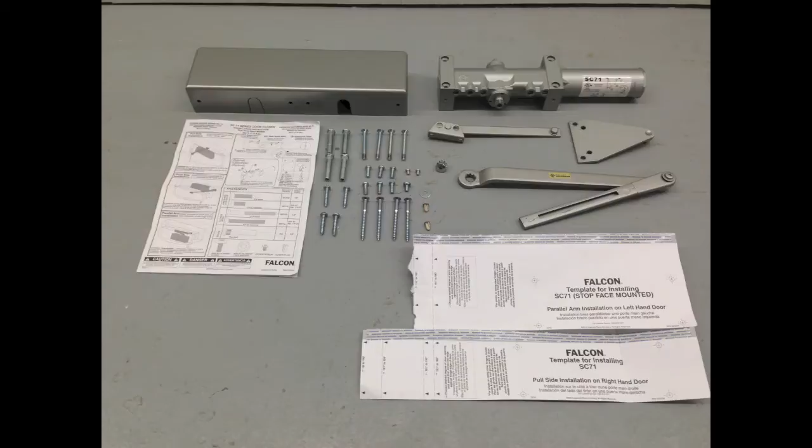These are the tools you will need. In the box, you will find the closer, regular arm, parallel arm bracket, rod and shoe, cover, screw pack, instruction sheet, and stick-on template. Unless specified otherwise, the Falcon SC71 is a universal closer that comes with all parts necessary to be installed with a regular arm, parallel arm, or top jamb mount.

The screw pack contains fasteners for wood and metal openings. You will have screws left over at the end of this installation. If this is a new construction project, check the hardware schedule to confirm you have the correct closer for the opening.

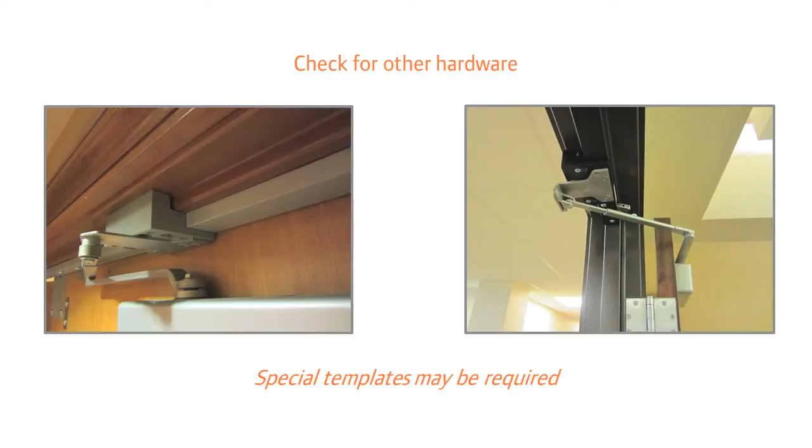Check the opening for other hardware mounted on the top jamb. Items such as a coordinator or overhead holder can affect the installation of the closer, and special templates may be required. Ensure the door swings freely, fits into the frame without binding, and that any latching hardware engages easily. There should be a 1/8 inch gap on the top and sides between the door and frame.

Determine the handing of your door. To determine the hand of your door, first put your back to the jamb where the hinges are. If the door swings to your left, it's a left-hand door. If the door swings to your right, it's a right-hand door. Next, determine how far the door opens and find the matching line on the template. In this opening, the door will open to 150 degrees.

With the door closed, affix the self-adhesive template to the inside of the door, aligning the edge of the template with the hinge and top edges of the door, as shown on the label. For doors with pivots or swing clear hinges, locate the closer and shoe from the pivot point of the door. Using the center punch, mark the locations to be drilled on the door and frame. Remove the template from the door.

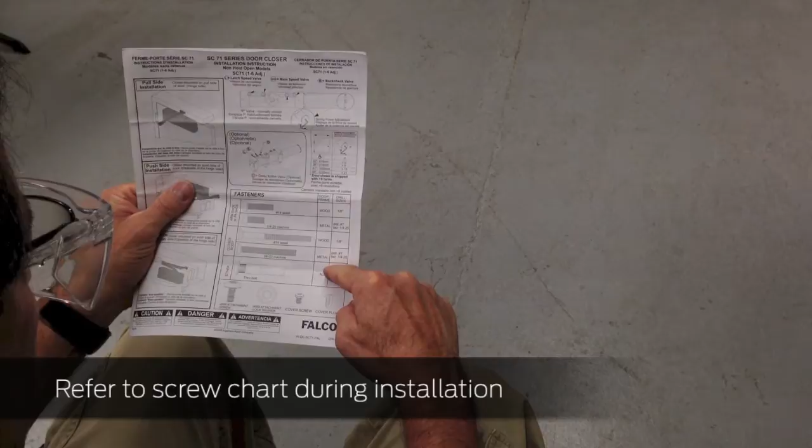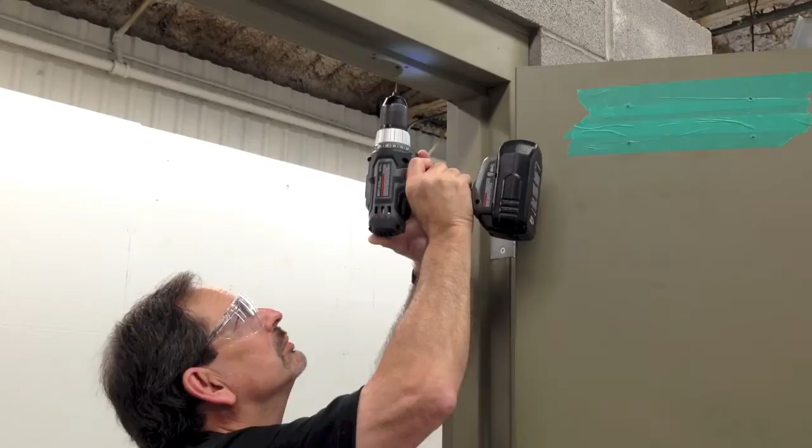Follow the screw chart on the front page of the installation instructions to determine the proper fasteners for each step. This chart also shows the size of the pilot hole needed for each type of screw. Using a number 7 drill bit, drill pilot holes in all marked locations on the door and frame. Using a 1/4-20 tap, tap each hole on the door and frame.

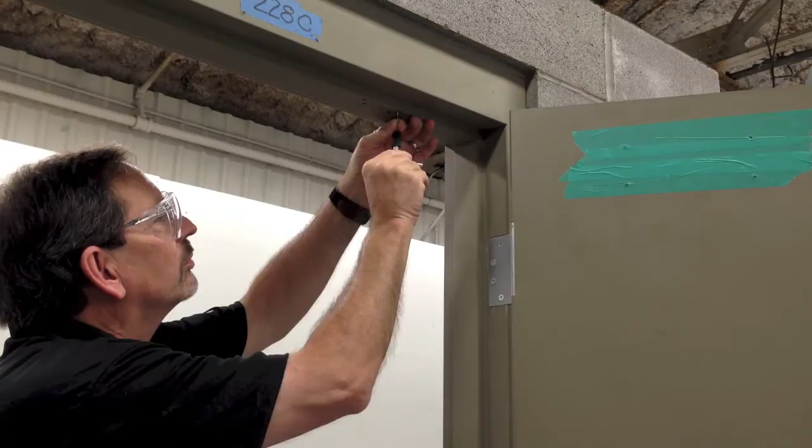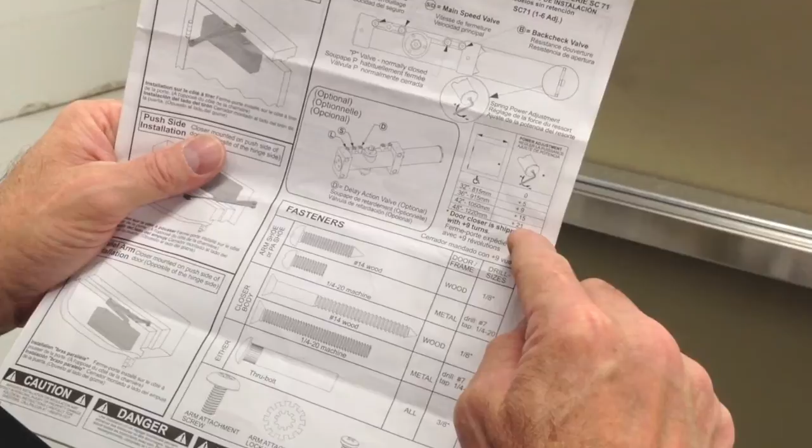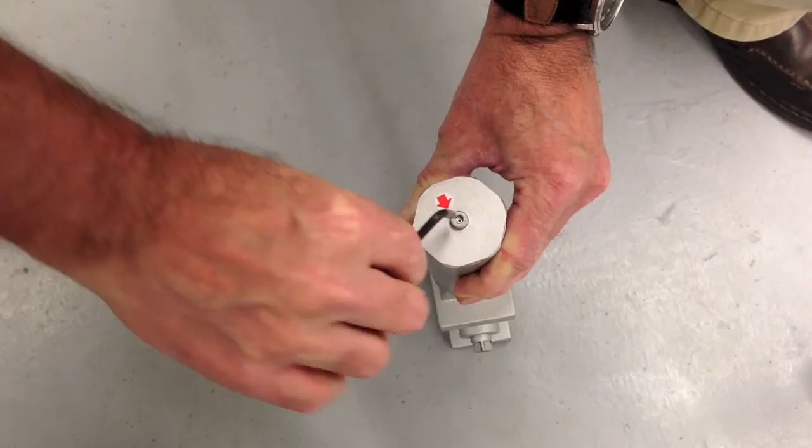The Falcon SC71 spring power can be adjusted to provide proper closing force for your door. Please note, an improperly adjusted spring may result in personal or property damage. Using the chart and the instructions, determine the spring power setting based on the door width and location of the opening. Falcon measures spring power by number of turns. Locate the door width and the corresponding number of turns. Adjust the spring to the correct number of turns using the 5/32 hex wrench.

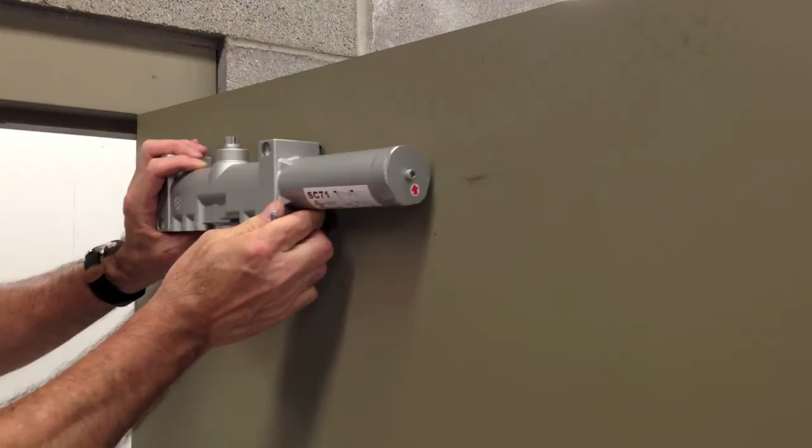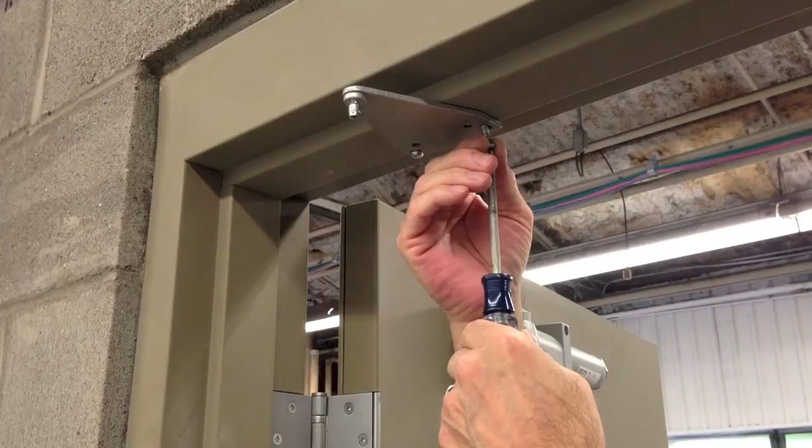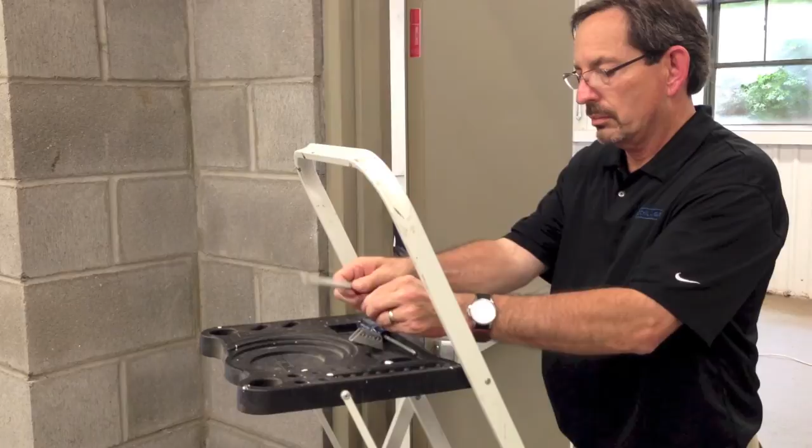In this video, we are installing on a left-hand door. The closer body is installed with the adjustment screws facing down and the spring tube facing away from the hinges. Attach the closer to the door using the 4 screws. Install the parallel arm shoe onto the frame using the 4 screws. Remove the rod from the arm shoe and, using the same screw and the washer from the screw pack, attach the rod to the parallel arm shoe post.

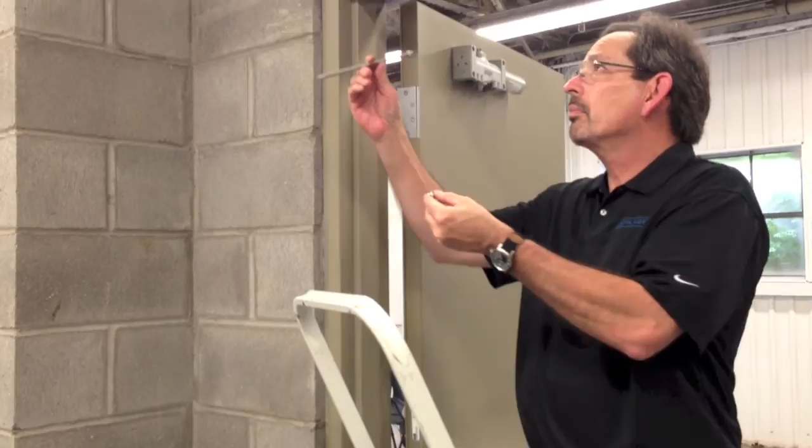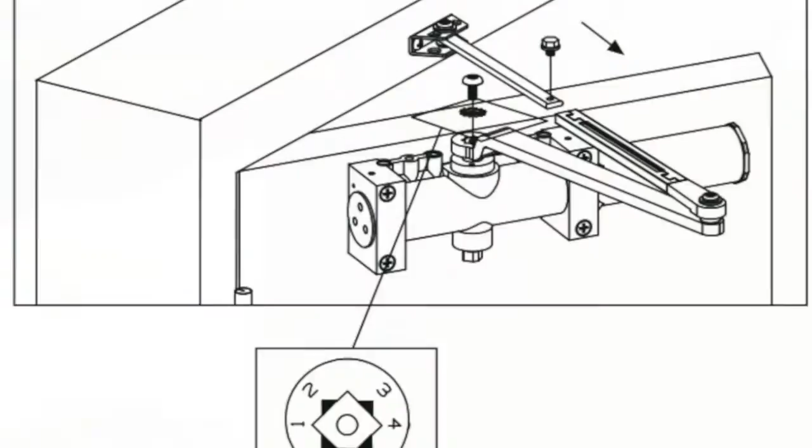Using the adjustable wrench, preload the lower pinion to 45 degrees and hold. Attach the main arm to the upper pinion on the closer body and secure with the screw. Ensure the flat on the pinion aligns with the arm as shown in the diagram.

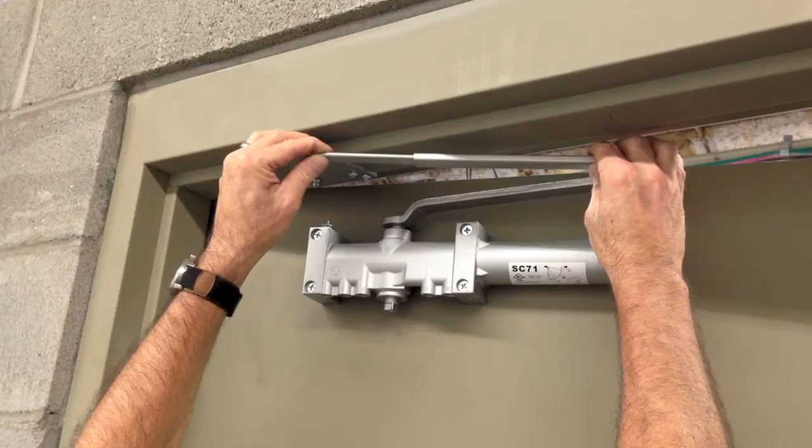Open the door slightly, slide the arm tube over the rod. Begin fastening the arm screw through the tube and into the rod, but do not tighten. With the door closed, pull the main arm slightly away from the door, just past parallel, and tighten the screw.

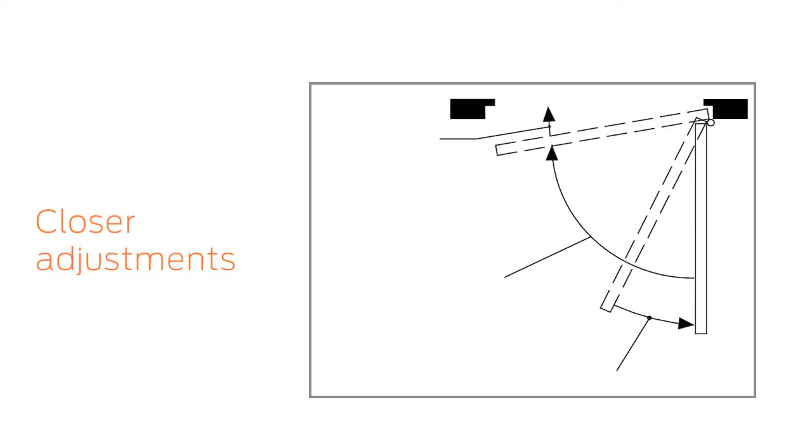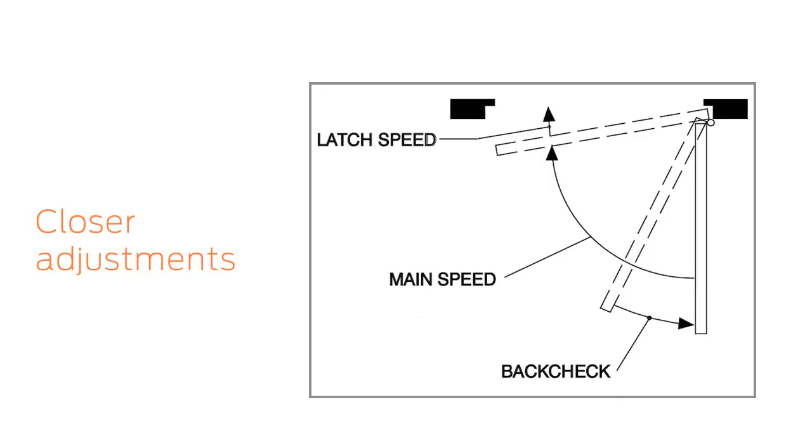Making adjustments to the closer allows you to control the motion of your door. There are 3 hydraulic adjustments that provide for optimal door closer operation. The closer comes from the factory adjusted for a typical opening. Your closer may need additional adjustments depending on your installation requirements. Before making any adjustments, cycle the door twice to observe its operation.

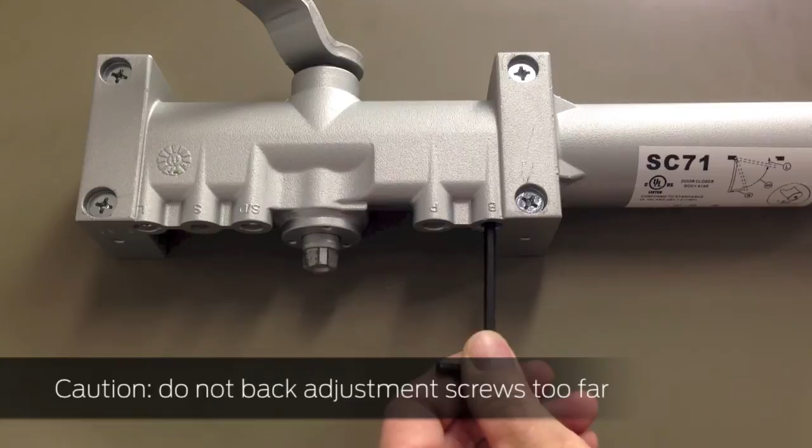Please note, do not back out the adjustment screws too far. If you are close to backing out the screw completely, you should feel increased resistance. Once you feel this resistance, do not back the screw out any further. Backcheck is the hydraulic cushioning to slow the door as it opens. This usually starts at 70 degrees. The door will slow down to reduce wear on the door, wall, and hinges. Backcheck does not serve as a door stop.

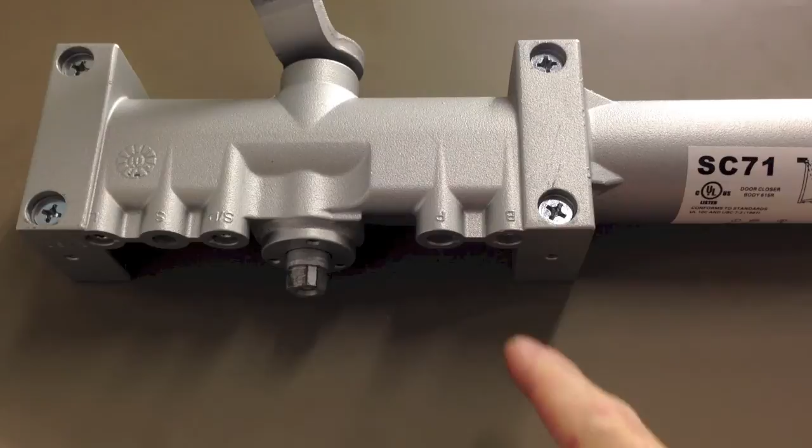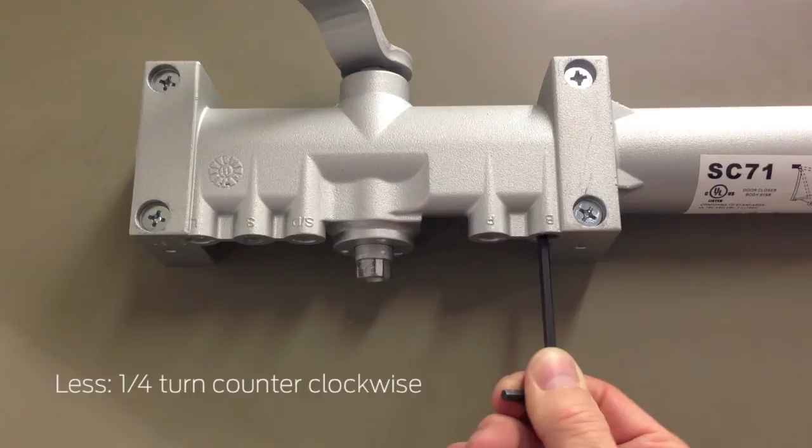To adjust it, locate the backcheck screw, which is the screw closest to the spring tube. If additional cushioning is needed, turn the screw 1/4 turn clockwise and test. If less cushioning is needed, turn the screw 1/4 turn counterclockwise and test. Do not use abrupt backcheck or use backcheck as a door stop.

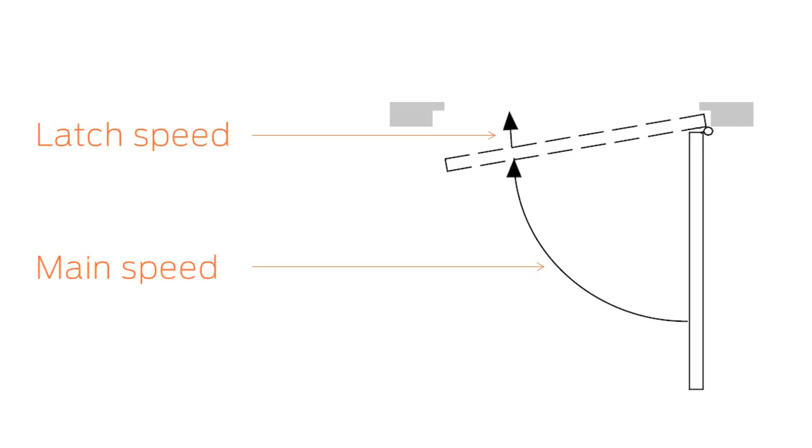The next 2 hydraulic adjustments are main speed and latch speed. The main speed is the speed at which the door closes from its fully open position to about 20 degrees. The latch speed is the speed at which the door closes during its last 20 degrees of closing. When changing these 2 closing speed adjustments, remember the Americans with Disabilities Act requires doors to take at minimum 3 seconds to close, from 70 degrees to within 3 inches of the latch.

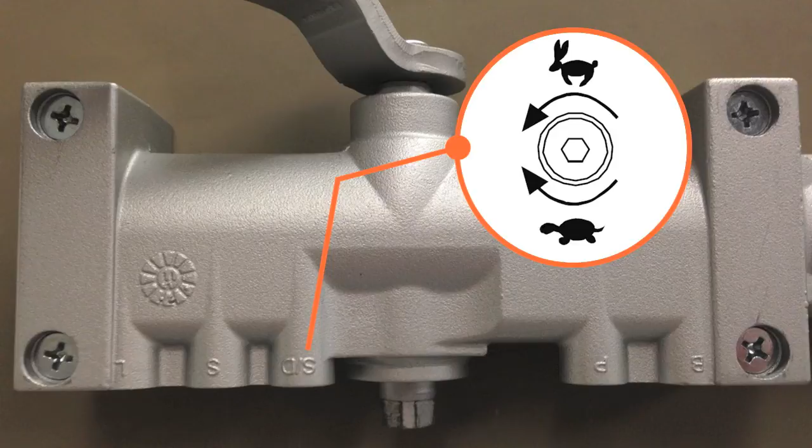Locate the main speed screw. It is the valve closest to the pinion, on the side away from the spring tube. Make an adjustment 1/4 turn at a time, clockwise to decrease speed and counterclockwise to increase speed. Then, open the door and release it to observe the closing speed.

Latch speed is the final adjustment. We recommend only small adjustments to latch speed. The latch speed screw is the adjustment screw farthest away from the spring tube. Make an adjustment 1/4 turn at a time, clockwise to decrease speed and counterclockwise to increase speed. Then, open the door all the way and release it to observe the latching speed.

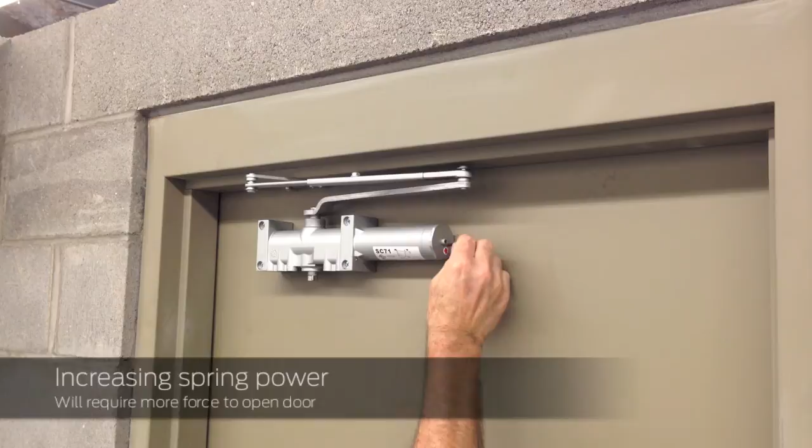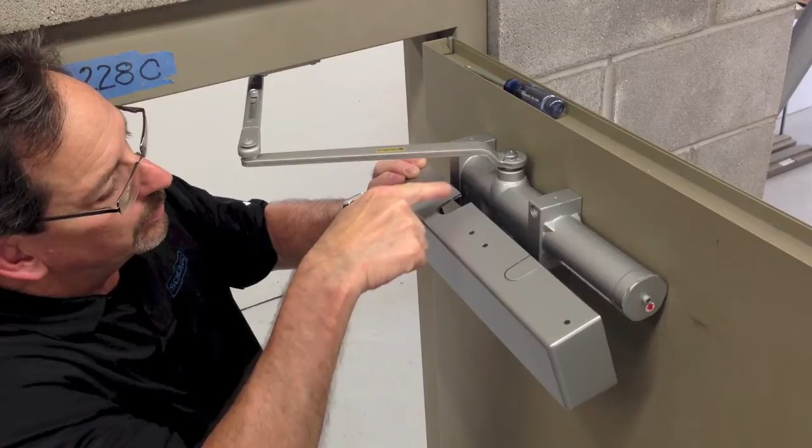If the door is still not latching, increasing the spring power can provide additional closing force. However, increasing the spring power will require more force to open the door. To install the cover, remove the knockout. Then attach the cover to the closer body with the 2 screws. To complete the installation, place plugs into the remaining cover holes.